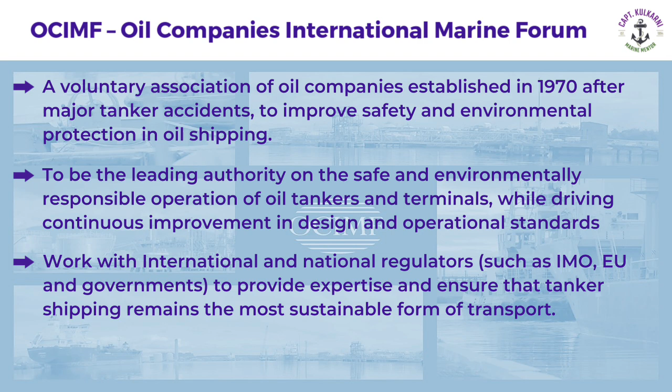The main aim of OCIMF is to ensure the safe and efficient operation of oil and gas tankers, terminals, and related marine activities. To achieve this, OCIMF works on several fronts. It develops programs and best practices relevant to the maritime and energy transport industry. It coordinates closely with other maritime and energy transport industries, international organizations such as IMO, classification societies, and industry partners to align safety and environmental standards.

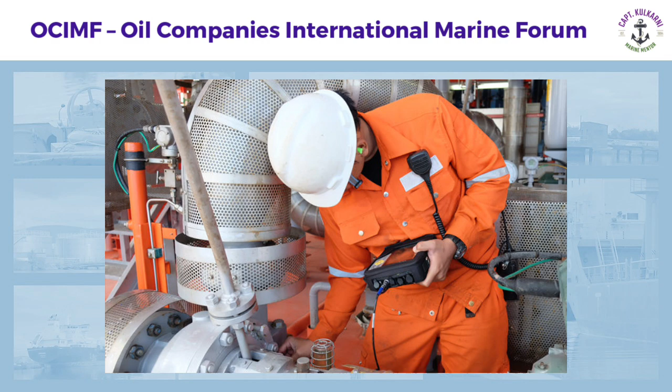And it publishes guidelines, frameworks, and technical documents that are widely used by shipping companies and inspectors across the world. In short, OCIMF plays a vital role in raising the safety standards of tanker operations and ensures that marine transportation remains safe, reliable, and environmentally responsible.

Today, OCIMF operates globally and is one of the main organizations promoting safe and responsible tanker operations. It achieves this through a few key programs. First, the SIRE program, Ship Inspection Report Program, which standardizes vessel inspections and improves transparency across the industry. Second, the TMSA or Tanker Management and Self-Assessment, which helps operators assess and improve their own safety management systems.

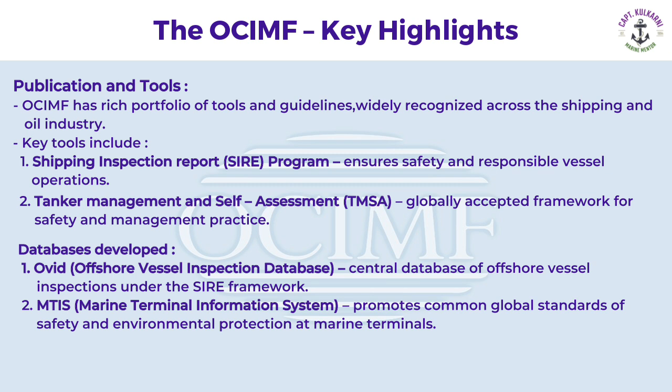OCIMF has also developed inspection databases for offshore vessels and marine terminals, ensuring consistent safety standards throughout the industry. Together, these tools make OCIMF a global leader in maritime safety and inspection practices. Let us take a look at some of the major milestones in OCIMF's journey.

In 1993, the SIRE program was launched, providing a standardized system for vessel inspections. Then, in 2004, OCIMF introduced TMSA, giving operators a tool to evaluate and improve their safety and operational performance.

Most recently, in 2023, SIRE 2.0 was introduced, a complete revamp of the original program with focus on digitalization, risk-based inspections, and enhanced safety standards. These milestones show how OCIMF has continuously evolved to meet the changing needs of the maritime industry.

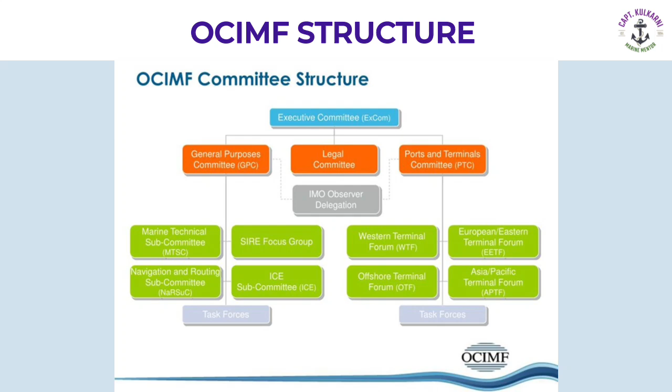Here, we can see a brief overview of OCIMF structure. In this video, we will focus specially on the ship inspection report, especially after the latest changes introduced with SIRE 2.0. This will help us understand how inspections are now conducted, what the new focus areas are, and what the outcome means for ship operators and crew.

The term vetting originally comes from horse racing, where a veterinarian would check a horse's health before a race. Today, the word is used more widely and simply means a careful and critical examination to determine whether something or someone is suitable for a specific purpose or job. In the maritime industry, vetting ensures that the ship, crew and operations meet the required safety and quality standards before being accepted for oil, gas, or chemical transport.

How is vetting done and why is it important? Vetting ensures that a tanker is safe, reliable, and well managed while protecting the reputation of the shipping company. It also builds trust between ship owners and oil majors. Before the inspection, all relevant documents are carefully reviewed.

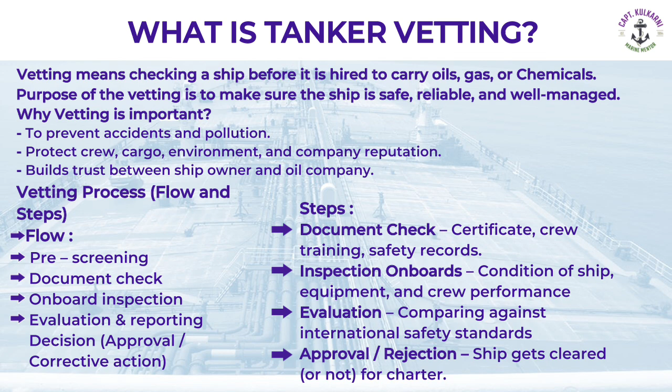Once everything is in order, a certified inspector boards the ship, conducts a thorough inspection, and prepares a detailed report. This report is submitted to SIRE 2.0 OCIMF, where the ship is evaluated. Based on the results, oil majors decide whether to approve the vessel for their cargoes.

OCIMF has a structured vetting program called the Ship Inspection Report. This program helps identify any errors or deficiencies on ships, barges, and terminals. Once an inspection is completed, the report is uploaded to the OCIMF database, which is accessible to all participants. This ensures that the industry has up-to-date information about the condition and performance of vessels and terminals, helping maintain safety, reliability, and transparency.

OCIMF started SIRE in 1993 to improve safety and environmental standards in shipping. Over the years, it expanded in scope, and in 2022, it was upgraded to SIRE 2.0. The new version focuses on collecting more detailed information before each inspection through a pre-inspection questionnaire, vessel certificate repository, vessel particulars, and vessel photographic repository. This ensures that the right questions are assigned and inspectors have all required details in advance. Overall, SIRE 2.0 aims to make the inspection process more structured, transparent, and effective.

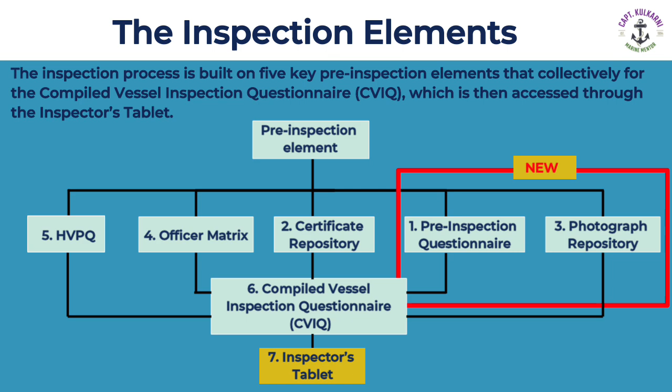The pre-inspection element or PIQ is divided into 5 parts, which we will discuss in the next slides. After the 5 elements are correctly filled, a compiled vessel inspection questionnaire is generated for that particular vessel and is later highlighted in the intrinsically safe tablet used by the inspector. What are the key elements which are filled in the vessel inspection questionnaire? General information, certification, crew management, navigation and communication, safety, pollution, security, cargo and ballast system, mooring, engine room and steering, overall condition.

Here we are going to look at all the key areas covered in the PIQ and later also reviewed during the visual inspection. These include certification, navigation, engineering, safety, pollution prevention, security, cargo systems and ballast system, all explained in detail. It is always a good idea for mariners to refer to OCIMF publications for complete guidelines and best practices.

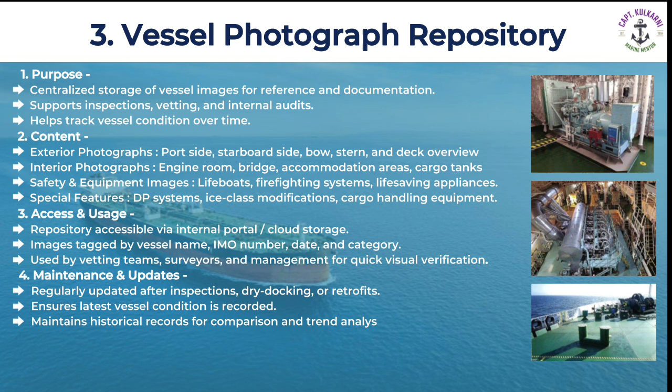In the certificate repository folder, all valid ship certificates are scanned and uploaded in the SIRE system. The SIRE team then verifies their authenticity to make sure everything is valid and up to date. This process helps reduce inspection time on board and makes the entire verification smooth. In the photographic repository, the latest photos of the ship are uploaded before the survey as required in the SIRE report. During inspection, if the surveyor notices any difference, they take new photos using their tablet. These photos are kept in the SIRE repository for record and reference.

The officers' matrix shows the qualification and experience of all the officers on board. The SIRE program gives preference to officers with higher qualifications and more experience. The harmonized vessel particulars questionnaire includes all key details about the ship, such as bridge and engine equipment, vessel size, and any special features. This gives the inspector a clear overview of the ship's setup before the inspection begins.

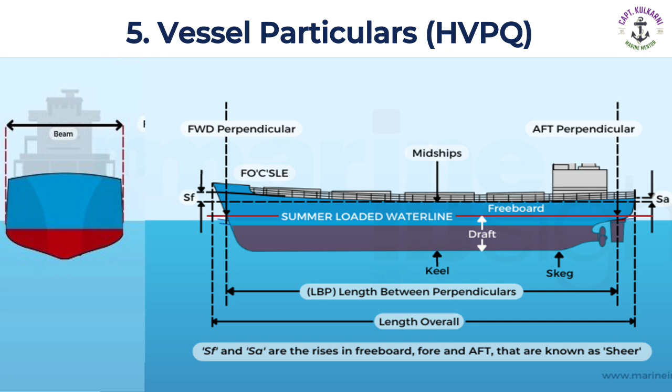What are the pre-inspection inputs? There are several items. The first is the pre-inspection questionnaire, which has to be filled up. All certificates need to be uploaded. The required photographs need to be updated. The officers' matrix has to be updated. The harmonized VPQ has to be updated and kept ready. The last 3 port state inspection reports are required, incident data for the last 18 months, and any major observation from the last SIRE inspection. All these details are entered. The system automatically compiles the information and creates a ship-specific unique questionnaire. This questionnaire is uploaded to the inspector's tablet and is known as CVIQ, Compiled Vessel Inspection Questionnaire.

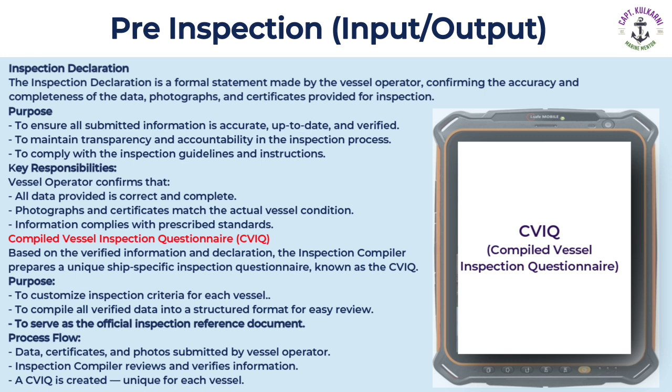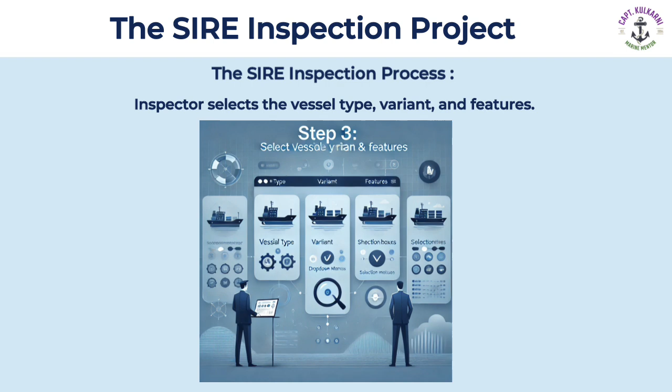Let us talk about the inspector's tablet. It has to be intrinsically safe and certified to work on tankers. SIRE software is downloaded and updated to the latest version. The inspector selects the vessel. A customized CVIQ is automatically generated, which will give all the questions required.

Are all the questions asked by the surveyor equally important? Not really. They are divided into 3 main categories: core, rotation 1 and rotation 2. The upcoming port state control campaign questions fall under the core section. Along with these, there are some conditional questions, risk-based questions on the ship type and age, and even company-specific questions. This helps make the inspection more focused and relevant for each vessel.

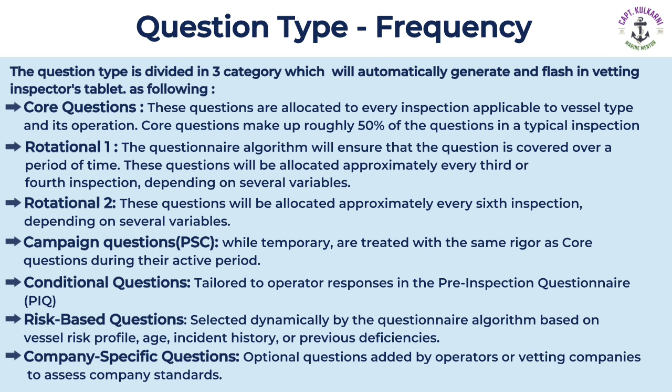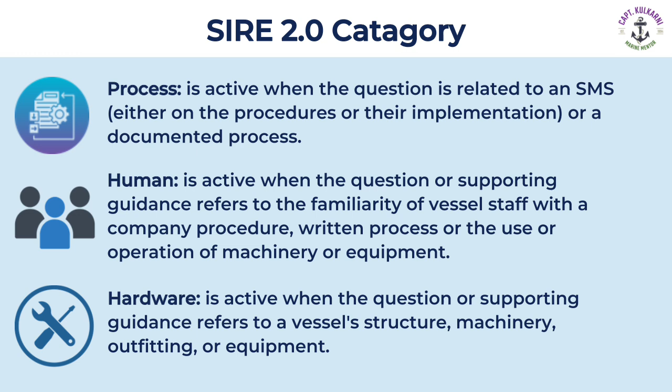The findings during an inspection are divided into 3 types: process, human, and hardware. A process finding is raised when there is an error in the ship's management system. A human finding comes up when a mariner lacks knowledge or training. And a hardware finding is noted when any equipment is defective or not working properly. Here is an example to help explain the previous point. Let's take a look at how a defect can be categorized as a process issue, a human error, or a hardware fault, depending on the actual cause.

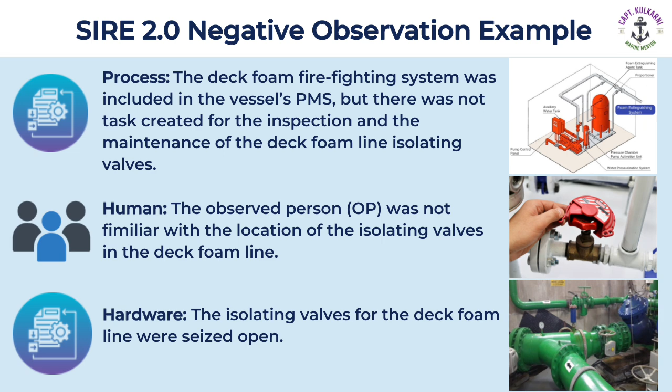Once the inspection is done, the report is sent to the SIRE committee for corrections. Later, it is sent to the ship operator for any clarifications. The time period is 6 weeks for clarifications. After everything is finished, the report is uploaded on the SIRE website. It can be sighted by members. For port state control inspectors, this report is free to access. The inspection report is a record of factual observations. Charterers carefully review it before deciding to hire the ship, ensuring they know exactly what to expect.